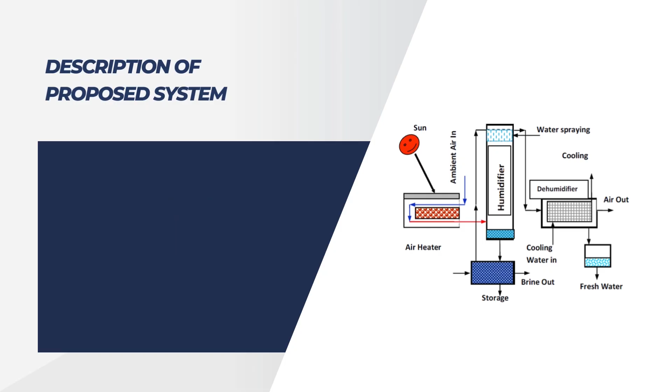As can be seen in the figure, the proposed solar water desalination system with the humidification dehumidification technique consists of a double pass flat plate solar air heater, which heats up the air before it gets inside the humidification chamber. It is with two glass covers, a humidifying tower, and the storage tank and dehumidifier exchangers are also components of the unit. A schematic view of the system, based on the idea of closed water and open air cycle, is presented in the figure.

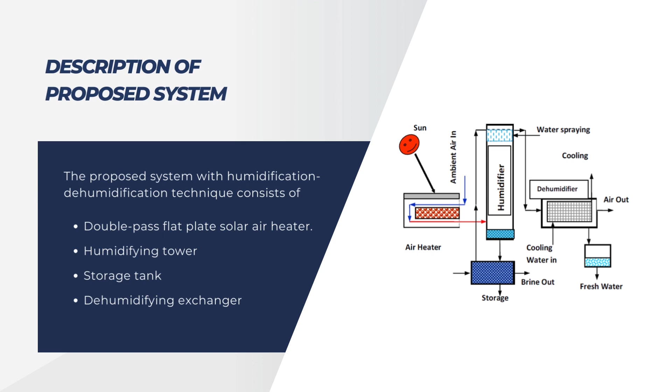In the proposed system, air is heated using the double pass flat plate solar air heater, whereas water is not heated, unlike in the case of solar stills. By heating the air, we increase the water carrying capacity of the air. In other words, we increase the vaporization of the water.

Firstly, the process air at ambient condition is forced to flow through the upper channel of the double pass flat plate solar air heater, where it is preheated. The preheated air is further heated by passing it through the lower channel of the solar air heater.

Secondly, the heated air leaving the double pass flat plate solar air heater enters into the humidifier and is humidified by saline water coming from the water storage tank in the form of spray droplets. Eventually, the air carrying water vapor is passed through the dehumidifying coil surface, where water vapor condenses and turns into fresh water. Also, saline water leaving the humidifier is collected back in the storage tank and recirculated to the humidifier once again.

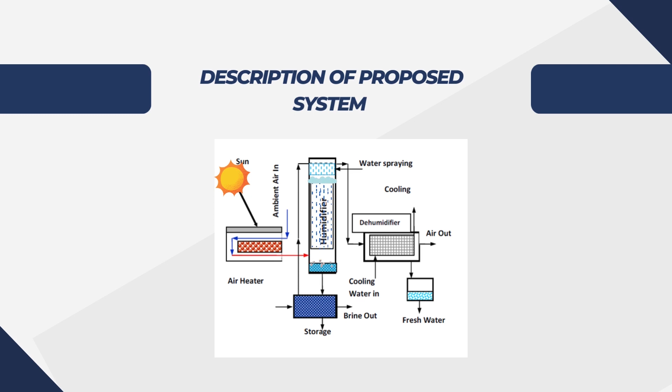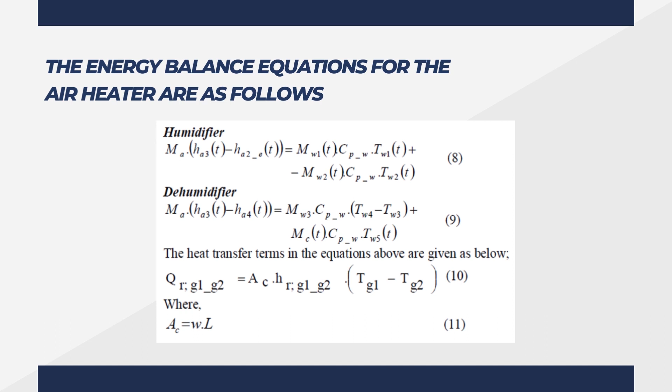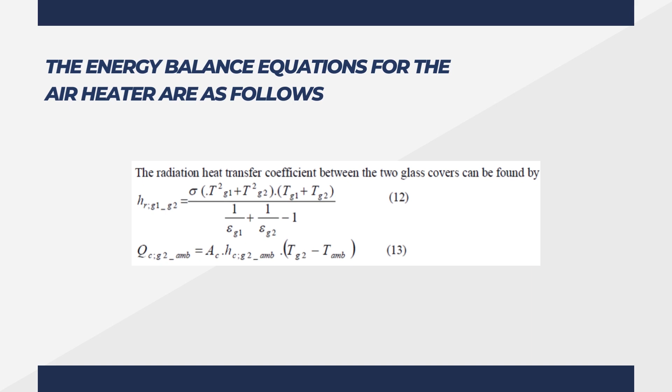The radiation heat transfer coefficient between the two glass covers can be found by the relation shown. The convective heat transfer coefficient for the air flowing over the upper glass cover can be given by the following empirical relation, shown by equation numbers 14, 15, and 16.

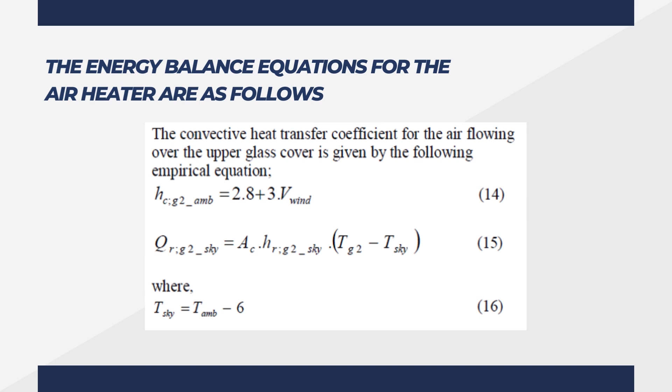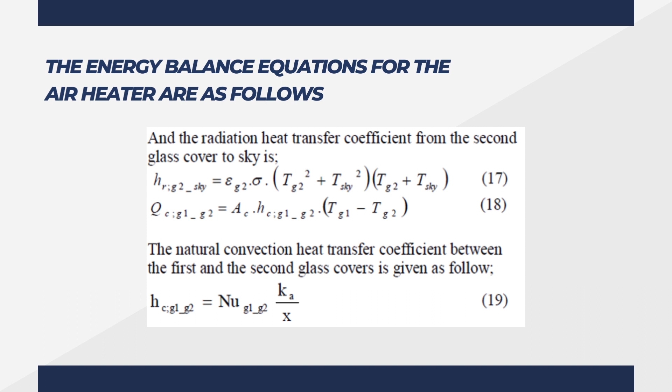The radiation heat transfer coefficient from the second glass cover to the sky is given by equation number 17, and then by equation 18, the natural convection heat transfer coefficient between the first and second glass cover is given by equation number 19.

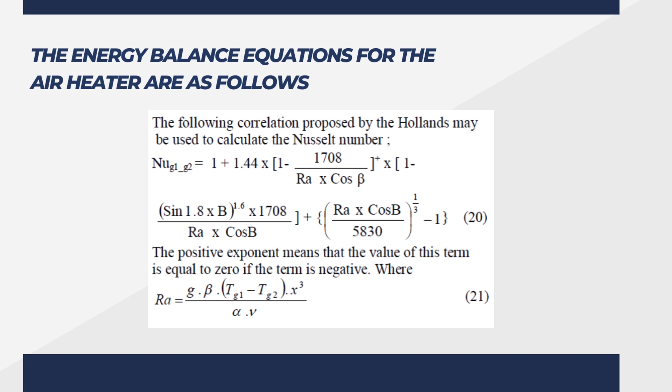The following correlation proposed by Hollands can be used to calculate the Nusselt number, by equation number 20. The positive exponent means the value of this term is equal to 0; if the term is negative, then Ra is shown, which is nothing but the Rayleigh number, given by equation number 21.

Thermal properties of the moist air, suggested by researchers as a function of air temperature, are evaluated by equations 22, 23, 24 and 25.

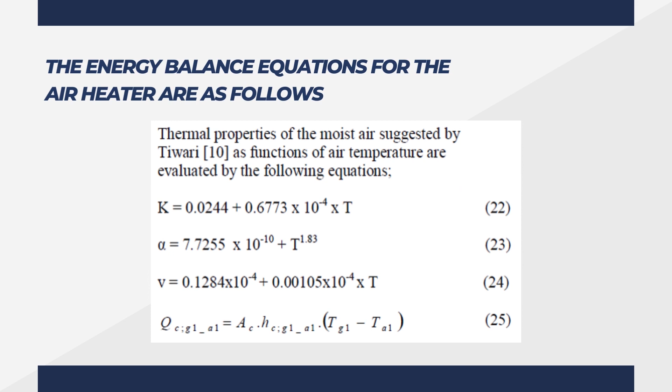The forced convective heat transfer coefficient inside the upper channel of the double pass flat plate solar air heater can be found by the relation shown in equation number 26, where equation number 27 gives us the hydraulic diameter.

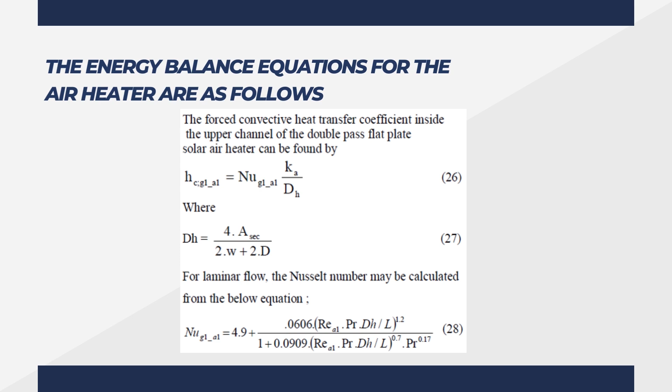For laminar flow, the Nusselt number may be calculated from equation number 28. For turbulent flow, the following correlation can be used to determine the Nusselt number, equation number 29, where Reynolds number is given.

F is the friction factor, given as equation number 30 and equation number 31, whereas the radiative heat transfer coefficient is given by equation number 32.

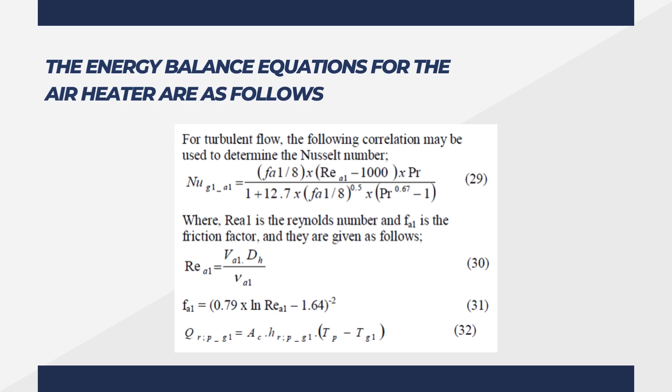The radiation heat transfer coefficient between the copper absorber plate and the first glass cover is calculated by equation number 12, replacing Tg2 with Tp and epsilon G2 with epsilon P.

We can find out the various heat transfer coefficients as shown in equations 33 and 34. Applying assumption 4, we can find out the temperature by equation number 35 and heat transfer by equation number 36.

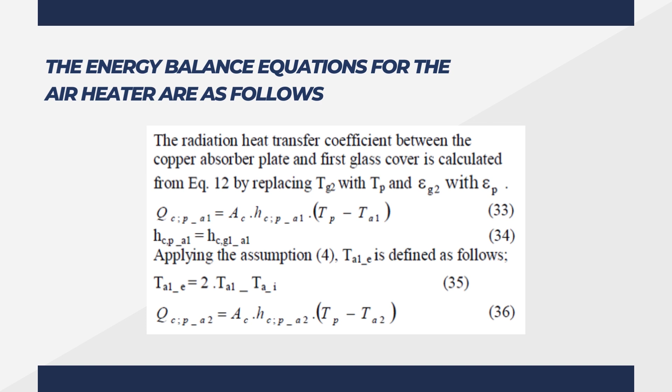The convection heat transfer coefficient Hc from P to A can be found inside the lower channel of the double pass flat plate solar air heater, evaluated from the equations shown above, which are used to calculate the convective heat transfer coefficient for the upper channel. Thermal properties of the air flowing inside the lower channel should be taken at the mean temperature of the second air pass, and the heat transfer can be obtained by equation number 37.

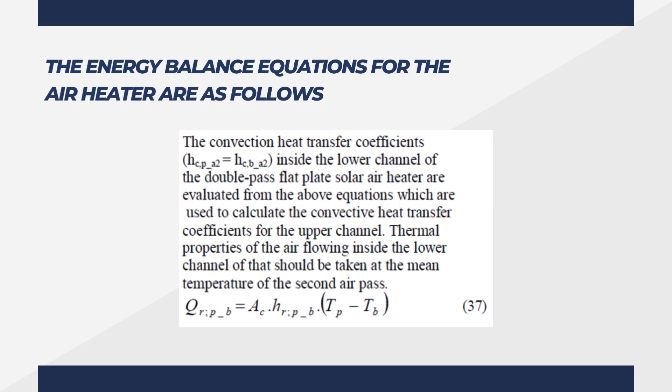Applying assumptions 8 and 9, the following equalities can be obtained: the temperature and mass of evaporation by equation numbers 44 and 45, and the heat transfer by equation number 46.

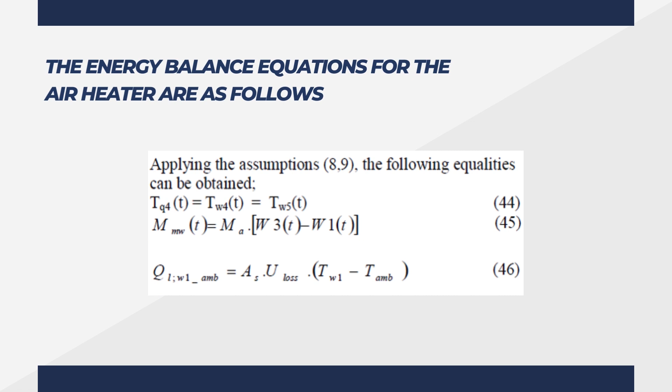The above mentioned assumed initial temperatures are used to determine the heat transfer coefficient that depends on the temperatures. Afterward, using the assumed initial temperatures and calculated heat transfer coefficients, the system of first order ordinary differential equations is solved numerically to obtain new temperatures that become initial conditions, and the process is repeated for the next time step.

As a result, after working out the inlet water and air temperature to the humidifier at each time interval, the temperature of the air leaving the humidifier can be calculated from equation number 8, and the temperature of the air leaving the dehumidifier can be evaluated from equation number 9. In the dehumidifier, the quantity of condensate water at each time interval is calculated from equation number 43 by knowing the inlet and outlet air temperatures.

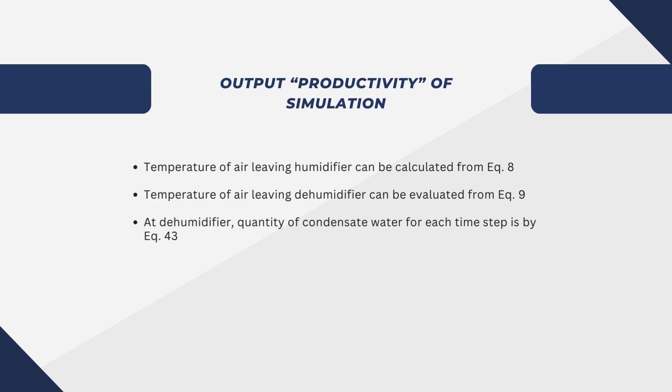The productivity of the proposed desalination system depends upon the humidifier and dehumidifier outlet temperatures. The effect of various operating and design variables on these outlet temperatures have been discussed below.

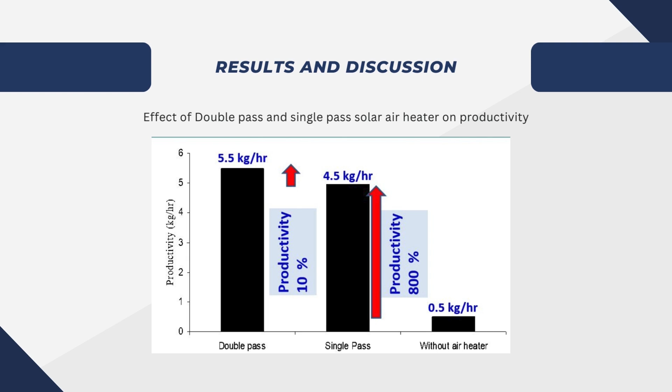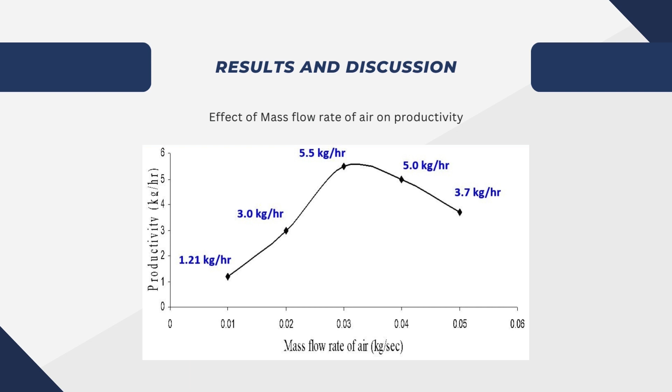This mass flow rate of air, 0.03 kg per second with productivity of 5.5 kg per hour, is the optimum value; any further increase does not contribute to productivity. Up to this optimum mass flow rate of 0.03 kg per second, the system gives a 400% increase in productivity with a 200% increase in air mass flow rate. After that, even with a 70% increase in mass flow rate over the optimum value, a 40% decrease in productivity can be observed.

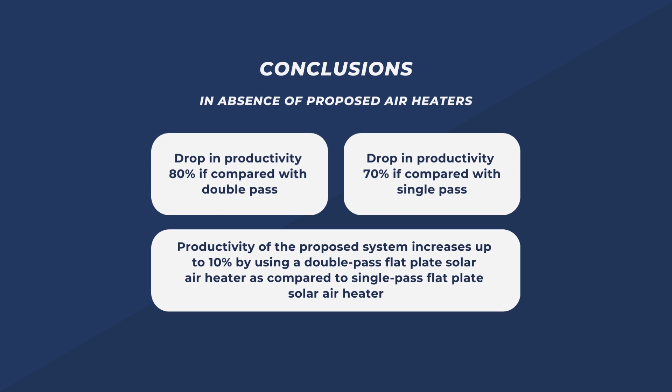As can be seen, the productivity of the proposed system increases up to 10% by using a double pass flat plate solar air heater compared to a single pass flat plate solar air heater. There is a drop in productivity of 80% compared with double pass, and a drop of 70% compared with single pass, in the absence of the proposed air heaters. This demonstrates the superiority of double pass solar air heaters over single pass solar air heaters, particularly for the proposed desalination system.

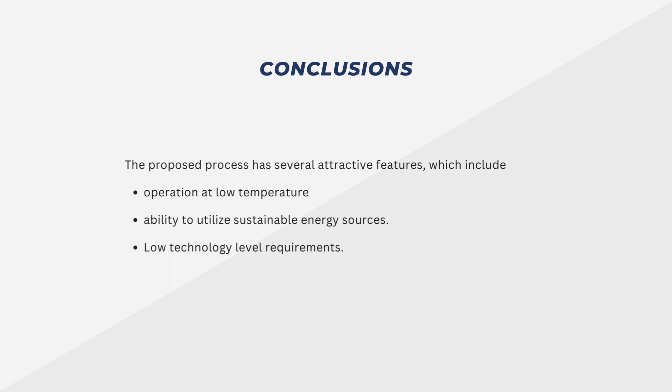The proposed process has several attractive features, which include: operation at low temperature; ability to utilize sustainable energy sources, such as solar and geothermal; and requirement of a low technology level.

Output of the solar still mainly depends on the temperature difference between the basin water and the glass cover. A greater temperature difference increases the rate of water evaporation from the basin of the solar still, resulting in increased condensation of water and thus increased distillate output. Conversely, a lower temperature difference lowers the output of the solar still.

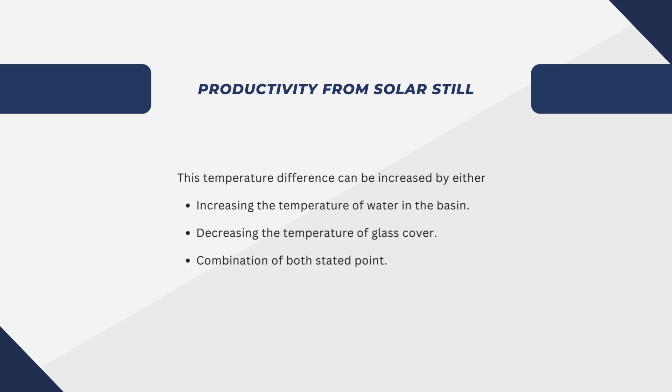This temperature difference can be increased by: one, increasing the temperature of water in the basin through active or passive ways; two, decreasing the temperature of the glass cover by flowing cooled water over it; or three, a combination of both, increasing the basin water temperature and decreasing the cover temperature together. There is one case where the multiple effect diffusion still can be used.

As you can see, the vertical walls are made of metal, with wicks mounted on the outside and a cooler surface inside. In this case, distillate output is generated through condensation occurring both beneath the double glazed glass cover and on the inner surface of the vertical metallic wall, on the other side of which wicks carry water flowing to keep it cool.

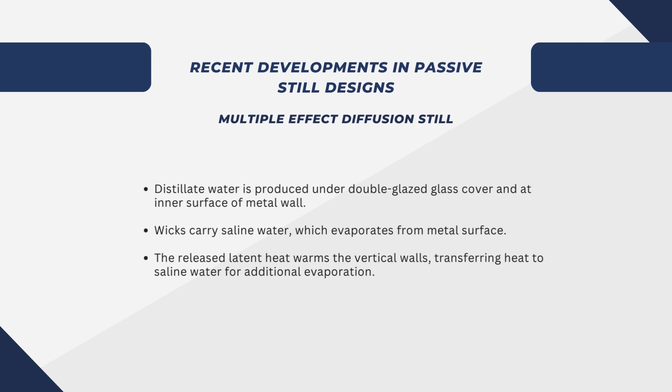On the opposite side of this wall, wicks transport saline water. As the saline water contacts the metallic surface, it heats and subsequently evaporates due to heating. Simultaneously, on the opposite side, cooling induces condensation. The latent heat of condensation is released to the vertical wall, which is then taken away by the water dribbling over the wicks. The vertical walls get heated.

Heat is transferred to the saline water trickling over it, and further evaporation takes place.

At the same time, condensation happens on the other side of the metallic wall, and this process goes on. These are called multiple effect solar stills.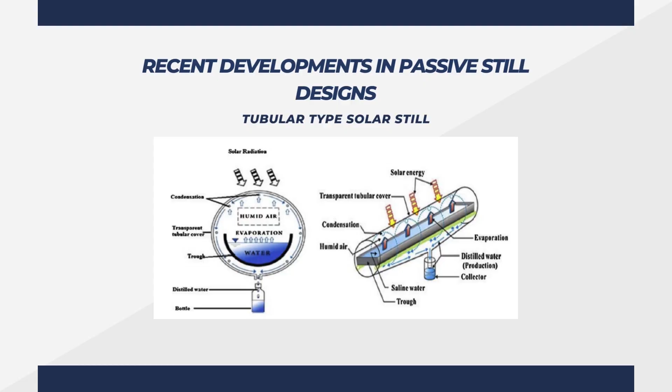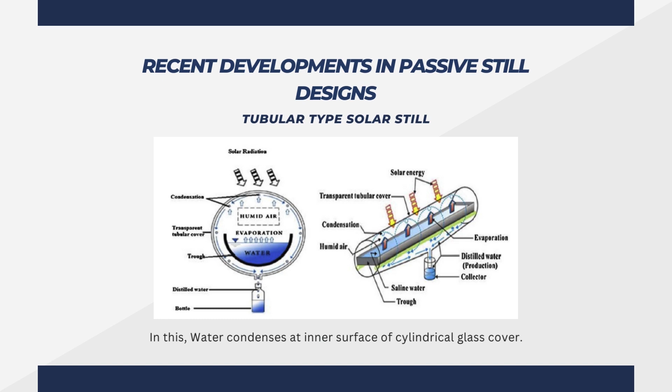There can be tubular type solar stills as well. The figure shows a tubular solar still consisting mainly of a transparent cylindrical tube in which a rectangular absorber is placed. Due to the gravity effect, the condensed water flows down over the inner surface of the transparent tubular cover and is stored in the collector provided at the bottom point of the trough.

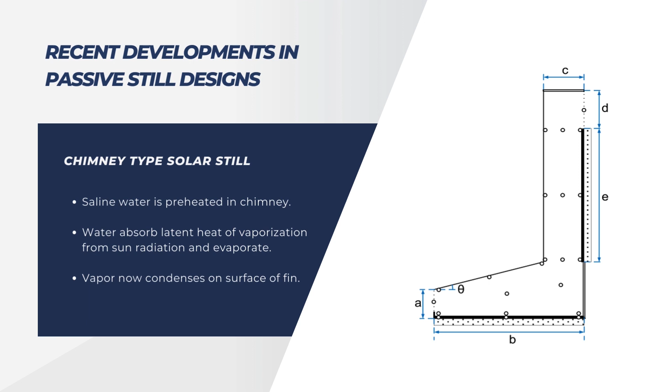Another one is the chimney type solar still. The saline water enters the chimney through the heat exchanger and then enters the still. It is evaporated in the still due to the solar radiation received as latent heat of vaporization. The vapor diffuses into the chimney and condenses on the external fins of the heat exchanger. The distillate water is collected at the base of the chimney and can be drained out for useful purposes.

Another one is the stepped solar still. The inclined wick solar still is modified here into the stepped basin solar still. This modification helps create a uniform wet wick film, enhancing the production rate compared to the inclined wick solar still. It is a combination of a number of inclined wick solar stills, as many as we want.

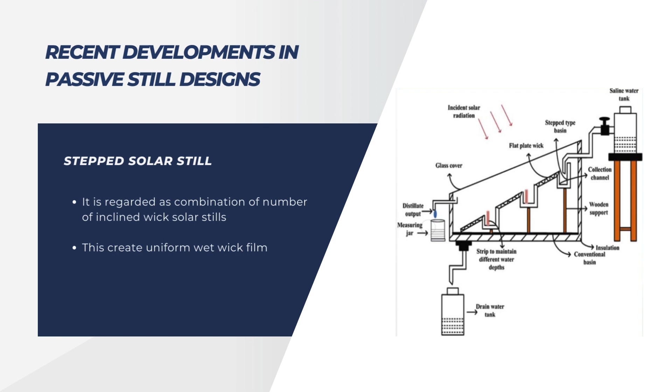Another type is the solar still with a separate condenser, in which the separate condenser, other than the conventional glass cover through which radiation is received, helps increase the temperature differential between the basin water and the condenser cover, which leads to increased rate of condensation and enhances the amount of distillate output produced per unit area.

Normally, the separate condenser is kept under shadow, so no sunlight falls on it, and it is usually made of metal. This gives us two different condensing areas: one conventional, the glass cover inner one, and another separate condenser made of metal. The separate condenser, whether metallic or glass, is arranged to stay in shadow to remain cooler, creating a temperature difference between the water and the condensing cover.

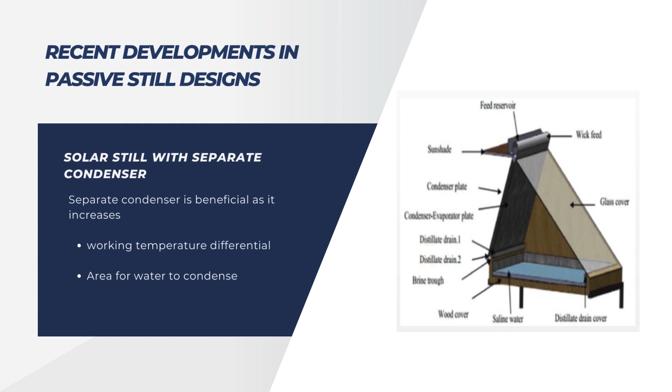Another one is the solar still coupled with a solar concentrator, in which the parabolic concentrator heats up the water, which can be used for two purposes: for heating water and for sending the heated water to the basin.

In this arrangement, basin water is supplied from the solar concentrator at very high temperature, which gets evaporated very soon and also condenses on the inner surface of the glass cover because of the temperature difference between the water and condensing cover, since the water temperature is very high. The maximum output produced has been noticed at approximately 10.77 liters per meter square.

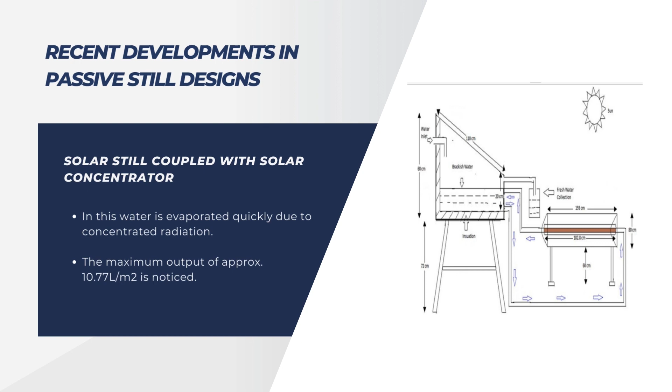The solar still can also be coupled with an air cooler, meaning cooled air from an air cooler is sent or blown over the condensing cover, to harness the cooling effect of the water in the cooler tank.

We can either blow the air cooler's air onto the surface of the condensing cover, or flow water from the cooler tank, which is at the corresponding wet bulb temperature, onto the dry bulb temperature surface. Somvanshi and Tiwari proposed integrating a solar still with an air cooler this way; by flowing cooler water over the glass cover, we reduce its temperature, thus increasing the difference between the water temperature and the condensing cover temperature.

In this design, evaporatively cooled water flows over the solar still's cover. This approach creates a greater temperature difference between the water and the cover, leading to a reported increase of approximately 58% in the annual distillate output in the climate of Jodhpur, India.

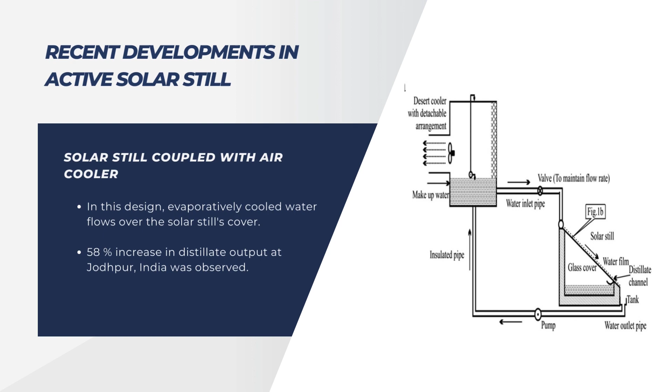Another configuration is the solar still coupled with a solar pond. The solar pond heats the water, and that water is used in the solar basin.

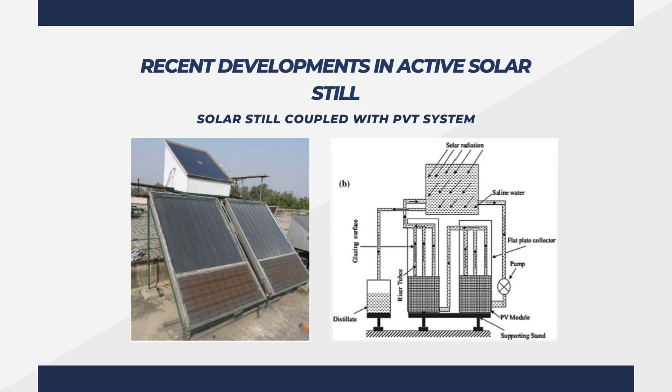So this is a 3-in-1 system: solar still coupled with a photovoltaic thermal system, where we are not using any conventional source of energy to send hot water from the flat plate collector to the solar still. It is found that the exergy-based energy payback time is lower, on the order of 89.90% and 44.45%, while the energy production factor is higher by 46.67%.

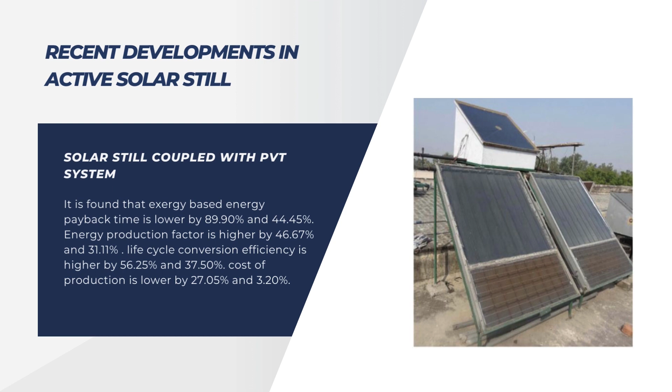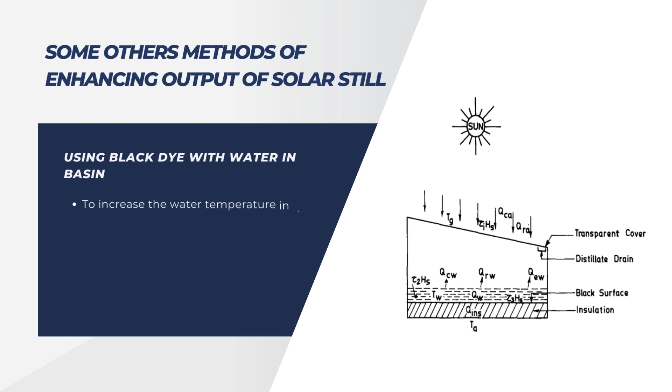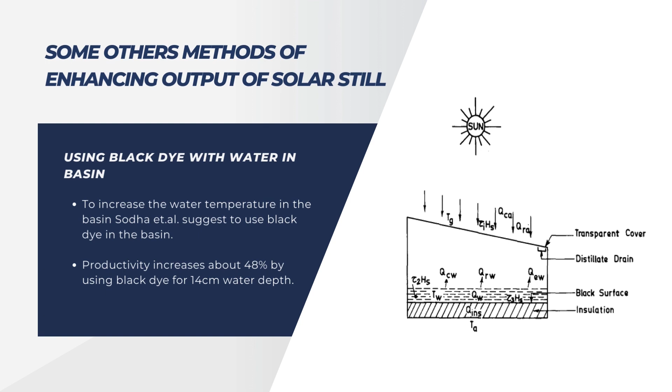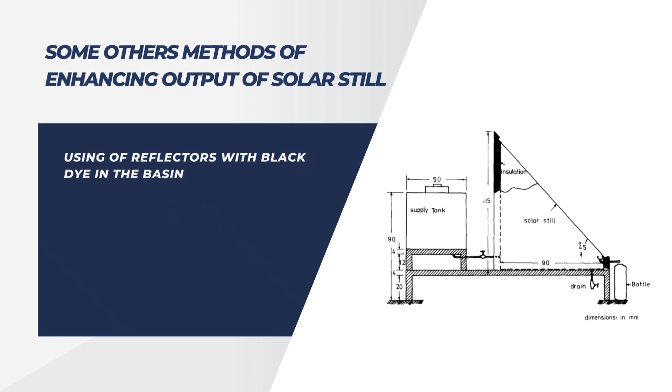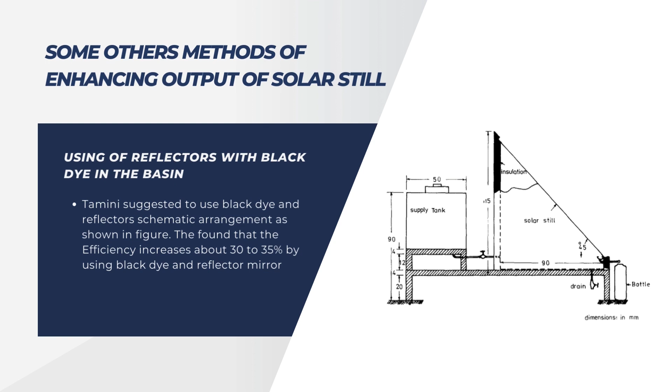Using reflectors with black dye in the basin, researcher Tamini suggested using black dye and reflectors, as shown in the schematic diagram. They found that efficiency increases about 30 to 35% by using black dye and reflector mirror together.

All these arrangements finally increase the temperature of water, and also increase the evaporation of water. Higher the rate of evaporation, the higher will be the rate of condensation as well, if we can ensure the temperature difference between water and condensing cover is a bigger value.

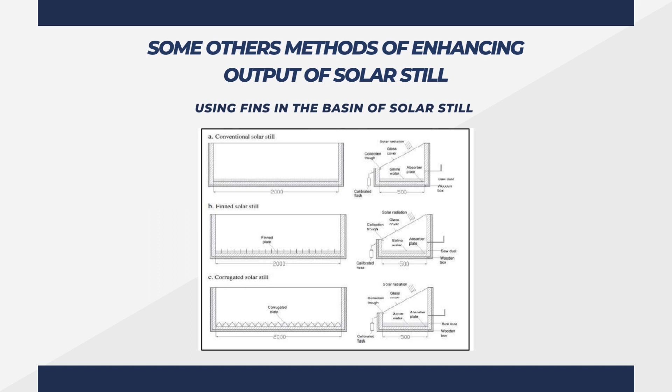Another scientist, Omara et al., experimentally compared the performance of conventional solar still, finned solar still, and corrugated solar still, and found that with finned and corrugated solar still the productivity increases approximately by 40% and 21% respectively.

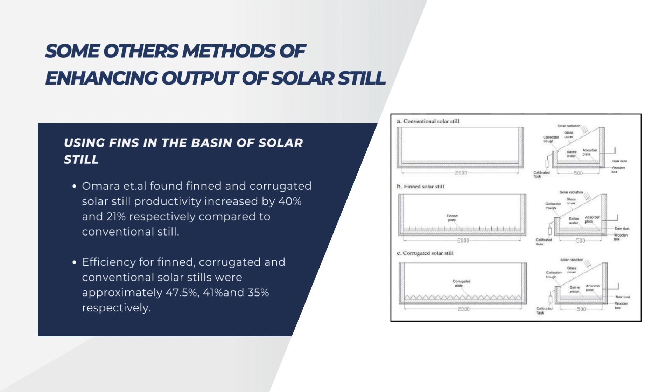The daily efficiency for finned, corrugated, and conventional solar stills were approximately 47.5%, 41%, and 35% respectively. Using strip fins attached to the absorber plate, researcher Ayuthaya et al.

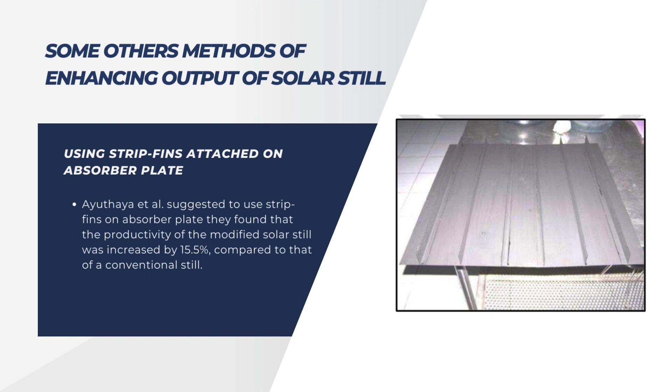Suggested using strip fins on the absorber plate. They found that the productivity of the modified solar still was increased by 15.5% compared to a conventional still.

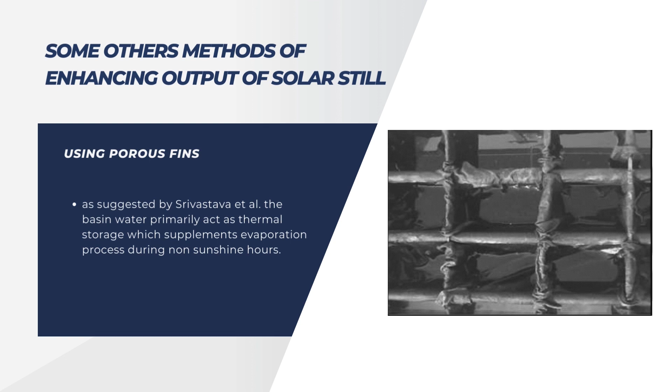Using porous fins in the basin water, for the same reason of increasing the evaporation rate and water temperature, as suggested by researcher Srivastava et al., the basin water primarily acts as thermal storage which supplements the evaporation process during low insolation, besides giving a reasonable nocturnal output even after sunset.

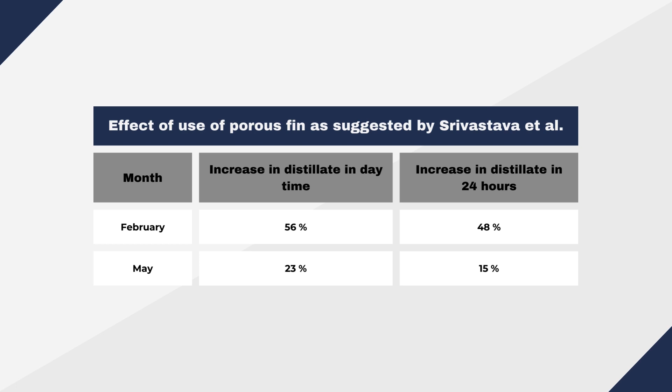56% higher per day time distillate and 48% higher for 24-hour duration was obtained in the month of February over conventional still, whereas in the month of May 23% higher daytime and 15% higher for 24-hour was achieved.

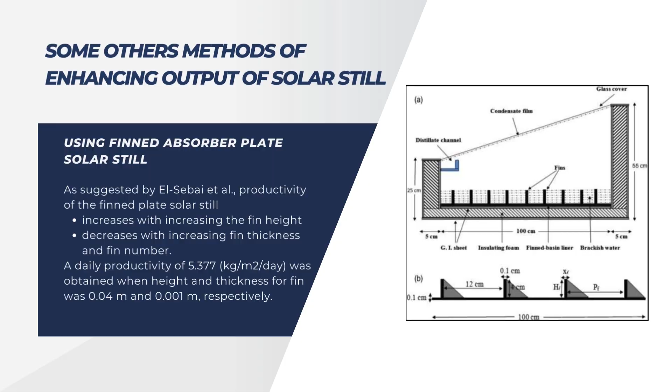A daily productivity of the order of 5.377 kg per meter square per day was obtained when the height and thickness of fins were 0.04 meter and 0.001 meter respectively. Using pin fin of wick element, researcher Alaian et al.

Suggested using pin fin wick elements placed on the absorber plate of solar still. They found that system efficiency of about 55% is recorded when pin fin wick is used. An enhancement in the still productivity of more than 23% is recorded during this set of experiments.

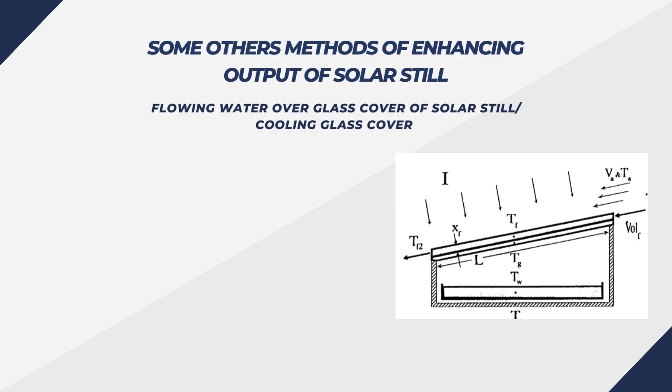Flowing water over the glass cover of a solar still, cooling the glass cover, is shown in the figure. A 7 to 10% increase in annual efficiency of a single slope solar still, as per Lawrence, has been found.

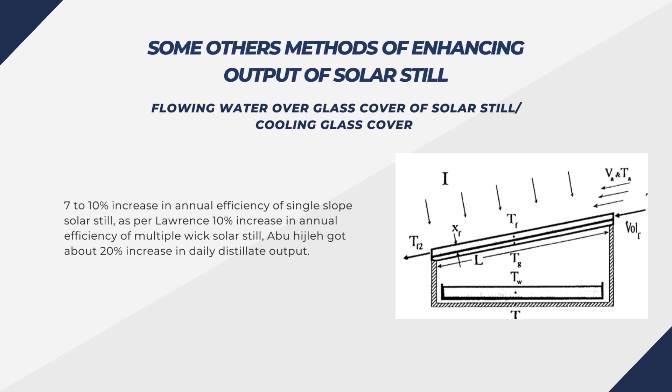There is a 10% increase in annual efficiency of the multiple wick solar still, and Abu Hijleh got about 20% increase in daily distillate output of solar still.

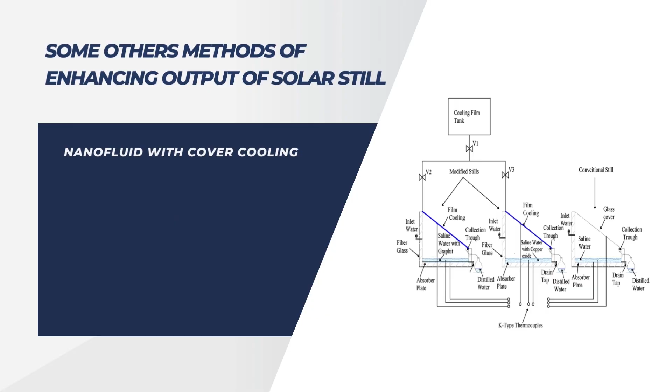Then, using the nanofluid with cover for cooling, researcher Sharshir et al. suggested using water over the glass cover as feed water.

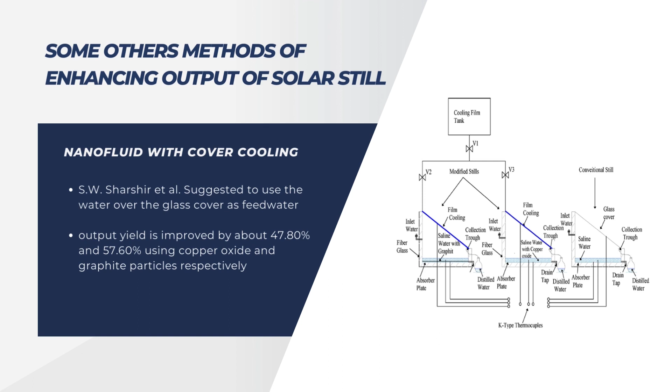The output yield is improved by about 47.8% and 57.6% using copper oxide and graphite particles respectively, while the daily efficiency of the conventional still is 30%.

Now, a small solar distillation plant cooled by water flow over the glass cover using garden fountain water. As can be seen in the figure, there are a number of solar stills connected with the fountain, and the fountain water is flown over each and every glass cover.

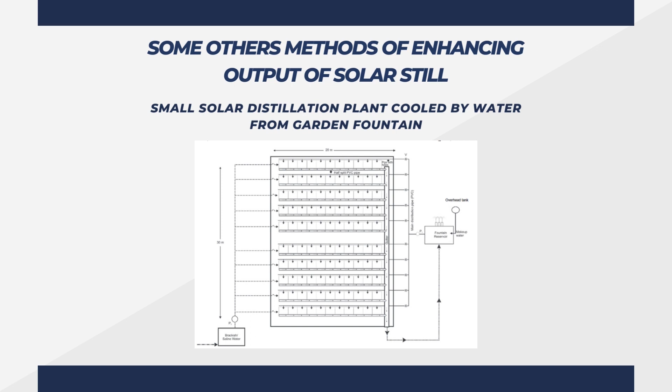Tiwari and Somvanshi, researchers, proposed a small solar distillation plant cooled by water from a garden fountain. They found the daily distillate output enhanced by the order of 61%, and the increase in annual efficiency of the single slope and multi-wick solar still about 15.5% and 17.4% respectively.